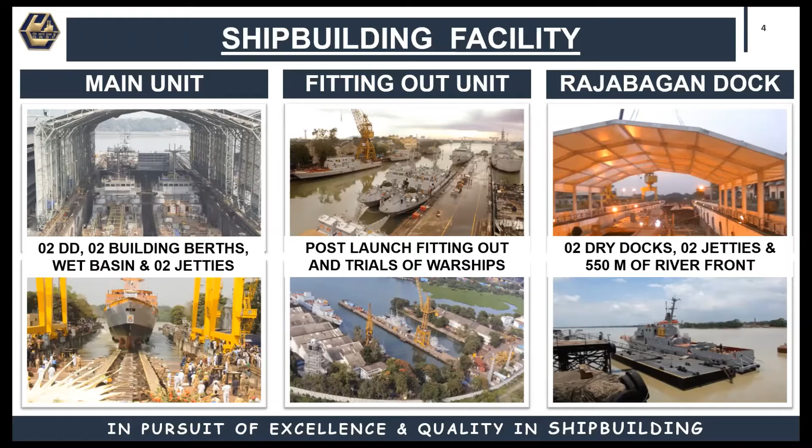Now, given the shipbuilding and repair locations of GRSE are spread at various physical locations, this put an urgent requirement for harmonization of production and inspection process with an aim of consolidated project progress monitoring. Now, few of the market-ready platforms were tried and tested without any fruitful gains. This paved the way for the indigenous development of digital platform, online inspection monitoring system, as a step towards digitalization and shipyard 4.0.

In shipbuilding industry, there exist a number of challenges faced in the adoption and realization of any digital talent. Not knowing one's business outcome is the first challenge, although it is not exclusive for shipbuilders. A well-known example for this case would be Kodak, where Kodak engineers were the first to develop digital cameras, but Kodak was not fast enough to capitalize on this technology, resulting in loss of their market hold.

Adopting an innovative technology requires a complete business transformation, but unclear vision of the technology's revolutionary capabilities instills fears of its disruptive potential. Traditional manufacturing mindset, industrial working culture, shipyards' physical condition, as well as long shipbuilding production cycles form the cultural barrier to digitalization. Picking the right platform to harmonize processes involving multiple stakeholders forms yet another hurdle, as shipbuilding puts a requirement of high customizability of the platform with each project.

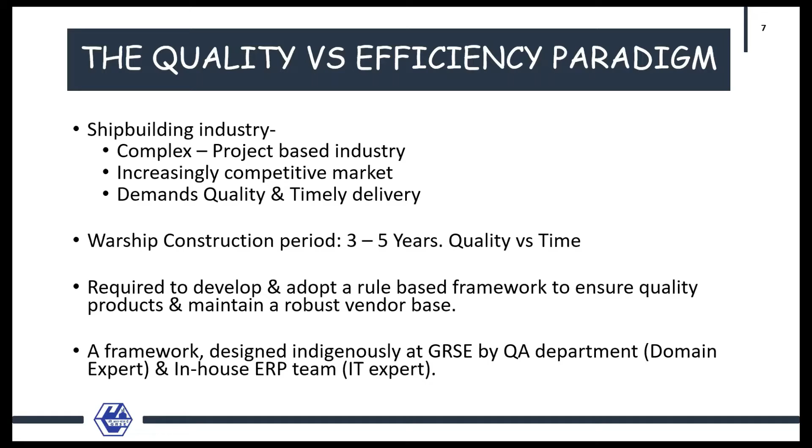With an increasingly competitive market, developing and adopting a rule-based framework to ensure quality products with timely delivery is extremely critical. With this, the foundation of OMS at ERP platform was framed with a focus to capture the quality activities of shipbuilding, in turn capturing project progress and maintaining a robust vendor base. Now, just to understand the concept, the idea behind OMS, I'll just show this flow chart.

Once the job is completed by production, the job is first internally checked by the production in-house QC team. At this junction, the job can either be accepted or rejected. The rejection results in corrective action by production and reoffer, while acceptance results in a formal offer being sent to quality assurance team of the yard.

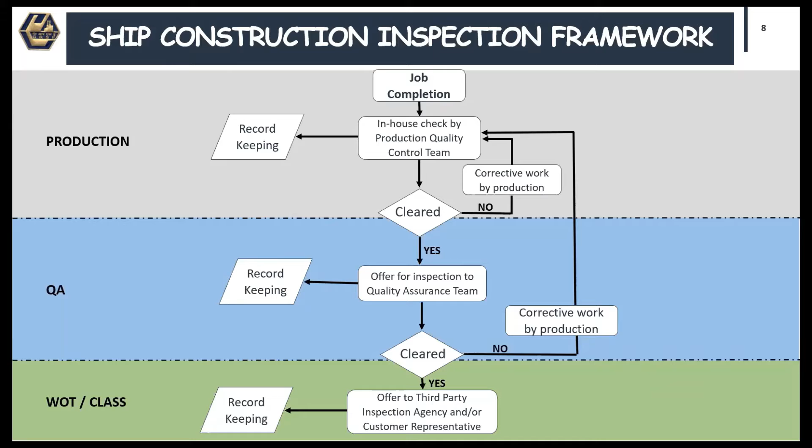The cycle repeats at QA, and acceptance of the job by QA results in an invitation for inspection being sent to customer representative or class surveyors. Irrespective of the job's acceptance or rejection, a record is generated at each of these inspection stages, which is one of the critical aspects of the whole inspection process. Now, this tree shows a typical snap of various stages of shipbuilding inspections.

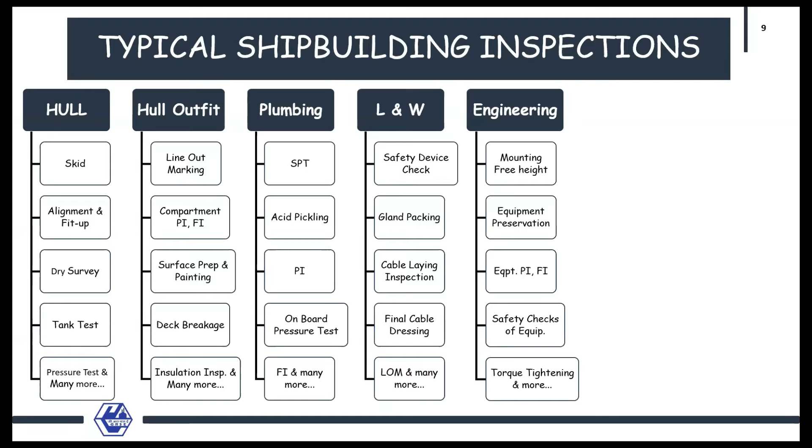The inspections are catalogued into various disciplines such as hull outfit, plumbing, electrical, weapons, engineering, etc. Each of these disciplines consists of a number of different stages of inspections grouped in various sequences. Construction of a defense vessel requires an amalgamation of hundreds of systems working perfectly in sync.

For the shipyard, this means manufacturing, assembling, and integration of thousands of discrete associated components comprising structures, pipings, cabling, etc. The various sequence of inspection stages is repeated for each of these smallest components for ensuring optimum quality, and at each of these inspection stages, a physical report is generated.

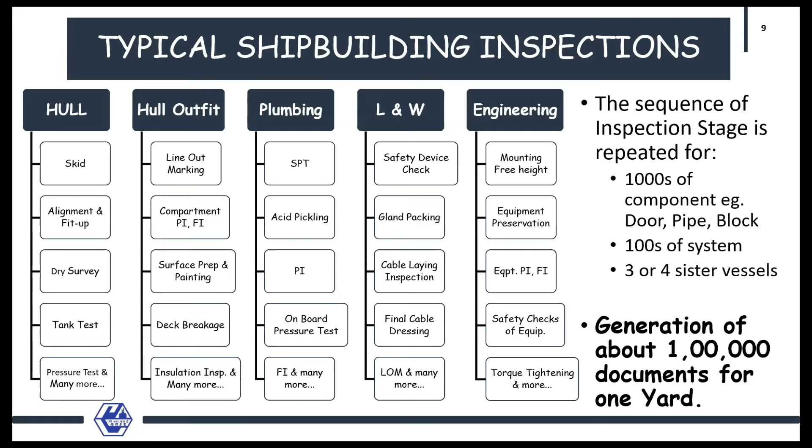Now, looking at this, one can really appreciate the amount of physical documents this generates, which range somewhere around 1 lakh, and that too only for one vessel. This is again repeated for each of the vessels being constructed in the shipyard. Now, generation of physical documents poses limitations in real-time monitoring of the progress of inspection, as well as storage and retrieval of historical inspection data.

Now, with these challenges, the OMS was designed to replicate the as-is process of inspection activities to an optimized workflow, which has been refined over the period by the vast experience of GRSE of building over 100 warships. OMS has been developed on the base stack of Intel hardware, Unix operating system, secure Java, and Postgres database.

As complete development of the platform has been done within the campus, the source code belongs to GRSE. Also, since the development stack has been chosen to be open source, it is independent of OEM for customization of software, as Java developers are easily available in the IT industry.

Inspection reports are generated in the system in a fillable PDF format secured with a PIN, which is unique for the user to which the job or inspection has been assigned. Each transaction in the system is done with an individual secured login ID, and every change made in the report is logged into the system.

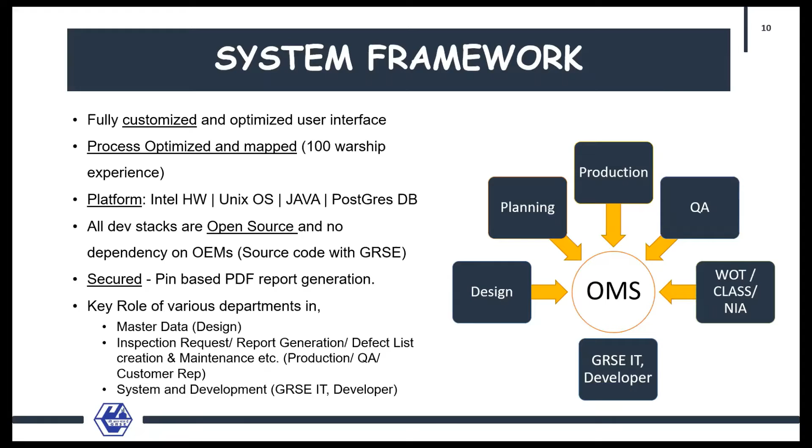The system framework defines the roles of various departments like design, planning, production, and inspection authorities for data creation, data feeding, maintenance, and inspection transactions on the software. Now, OMS is an industry standard open source IT platform developed with 5 key objectives.

The first, a single point of recording and retrieval of all inspection activities by various stakeholders. Second, an effective user interface, along with no restriction on number of users while adhering to the defense cybersecurity norms. Third, real-time tracking of components inspection and project progress monitoring.

Fourth, leveraging it to create a robust vendor base by capturing quality aspects of vendors like number of reoffers, rejections, time taken for completion, etc. Fifth, but not the last, leveraging OMS for data analytics, benchmarking, and AI capabilities.

Now, this is a sample of an OMS generated report, an editable PDF report actually, in which spaces are defined where various inspection stakeholders shall input their comments only in their marked areas and subsequently record their observations. This editable PDF is secured with a system generated PIN known only to the person on whose ID the inspection has been assigned.

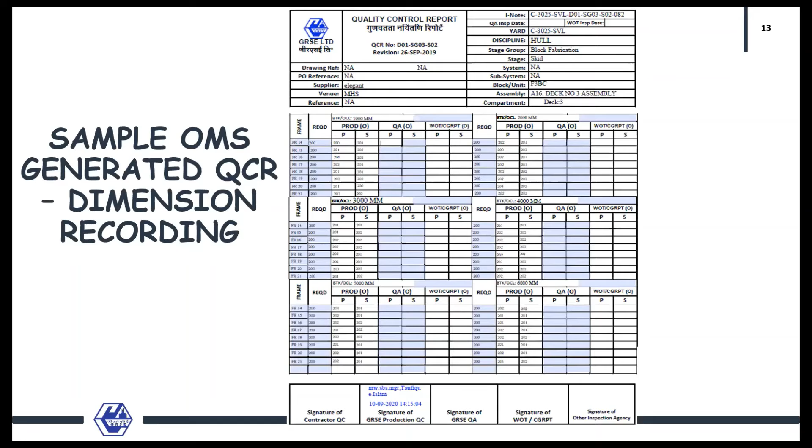The report formats have been designed such that all necessary parameters can be captured in the report during inspection. As can be seen here, there is a certain format for recording the dimension also during the inspection. The key advantage of using such secured and fillable formats is that these reports can be taken offline from the system to the site, filled, and then at a later time uploaded in the system at users' convenience.

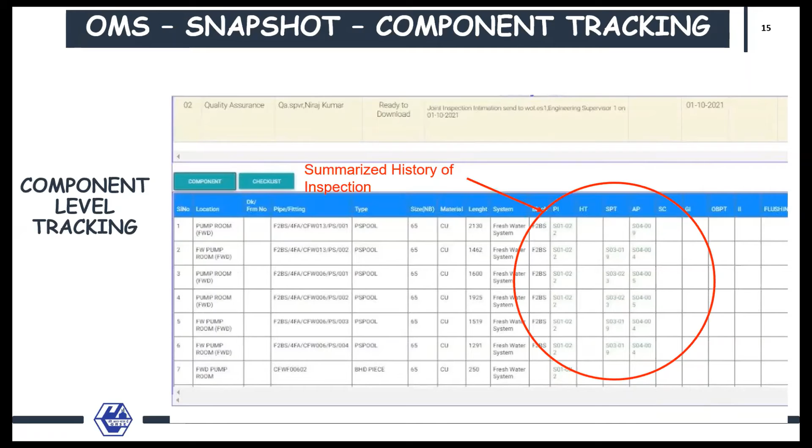Now, another key objective of the platform is project progress monitoring. A dynamic pictorial representation of the project as seen in the framework is automatically generated as various transactions are undertaken in OMS, giving a comprehensive depiction of current project progress.

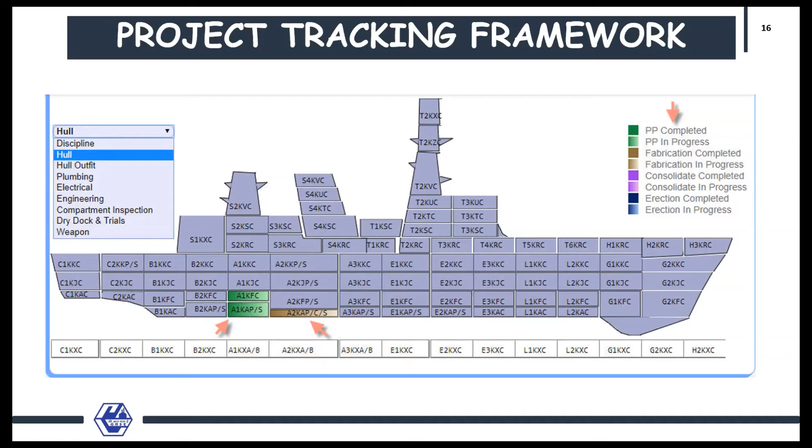Now, additionally, GRSE is in the process of implementing a total project management system with Teamcenter of PDM-PLM as a platform. A framework to integrate the data captured in OMS with that in Teamcenter is being developed right now. The framework for integration would require the summarized data like project progress to flow between the two platforms.

This would enable the user to view complete project data, including drawings, technical specs, as well as inspection progress at a single platform. With the implementation of OMS in GRSE, the inspection process has completely been revolutionized.

Comparing it with the previous manual system, the time taken to generate and process an inspection report for daily inspections has decreased significantly, where earlier a copy of inspection reports was physically moved to all stakeholders, including inspectors and class surveyors and their respective supervisors for endorsement. Now a report is endorsed with digital stamping of individual login details within a couple of clicks.

Maintaining traceability with OMS is a lot easier as all the historical data remains in the system and can be retrieved at any point of time, whereas the manual system mandated that the records be physically stored with appropriate care. The approach for project progress tracking has also become digital and system driven instead of manual.

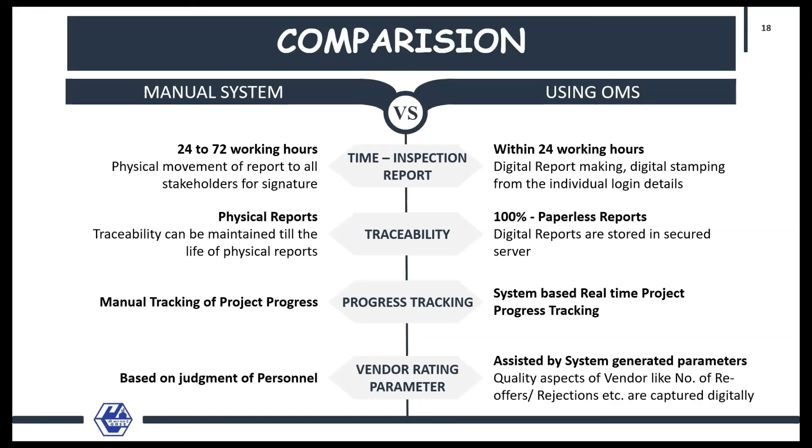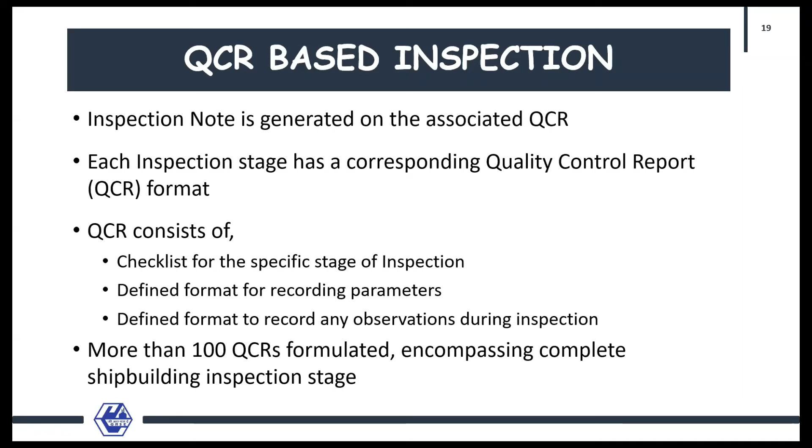OMS is further complemented by a QCR-based inspection report generation. Quality control report formats, or QCR in short, have been formulated for each stage of inspection. These formats primarily consist of checklists for individual inspection stages, a defined format for any parameters which must be recorded during the inspections, as well as spaces for the inspection authority to record their observations. More than 100 QCRs have been formulated, which encompass complete shipbuilding inspection stages.

OMS achieves a balance of both time as well as cost saving by being a single point of all inspection transactions and report generation, tracking the progress of the project, tracking delays in the project and aiding in preventing any LD due to the same, providing a platform for record keeping and retrieval of historical inspection data in a paperless manner, identification of efficient vendors and thus creating a robust vendor base, identification of critical areas of a project before it hits time and cost overrun, and also its capability of data analysis through MIS.

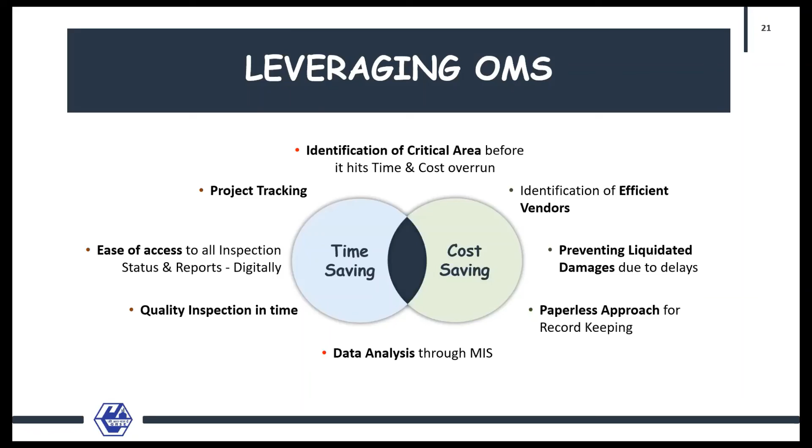Now, OMS is developed with a base stack chosen such that it is easily available in the market, is better virus resistant, and also provides independence over OEMs for customization, as the development stack is open source and Java developers are easily available in the IT industry.

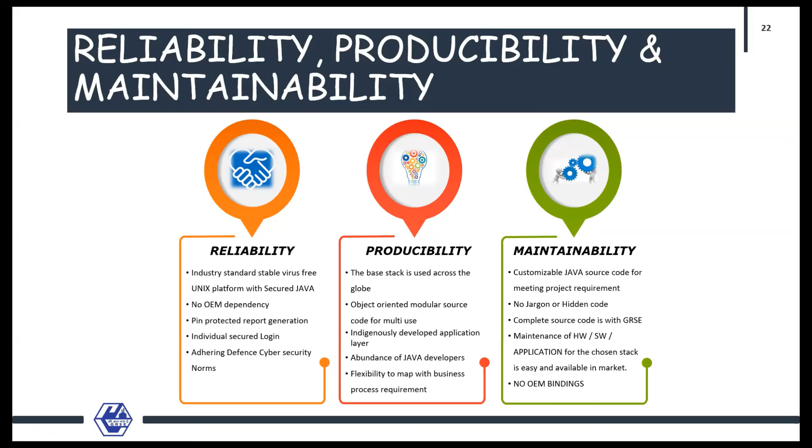Features like PIN protected report generation, individual secured login, flexibility to map with business process requirements, and, as the platform is developed in-house, no jargon or hidden code, in turn tend to enhance its overall acceptance and usage.

The concept of OMS has been approved by various stakeholders involved in the project, with production, GRSE production, GRSE QA, Indian Navy reps, WOT, as well as the classification society. OMS has been divided into various modules based on discipline. Each of these modules has been launched in a phased manner only after getting concurrence from all involved stakeholders for that module.

Now, since all the historical records of inspection are stored in OMS and can be easily retrieved at any point of time, the customer's confidence in this platform has increased time and again. OMS, being a platform which has been developed completely in a shipyard's environment, has the ability to completely align itself with various project requirements. In OMS, the development of workflow is governed by the as-is process requirement and not the other way around.

The concept of PIN-based fillable PDF forms was introduced, which is a key feature of OMS and can be extended to various business applications of various organizations. The PDF allows various stakeholders involved during the inspection to fill up their respective data elements in the report, which then can be fetched by the system and used for the purpose of data analytics.

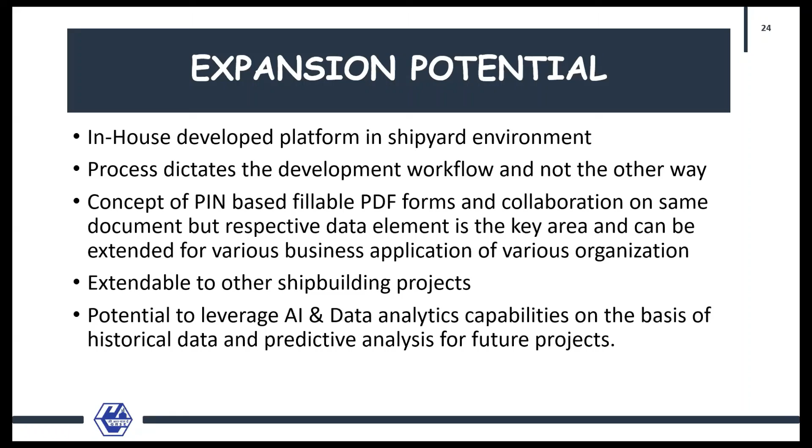Using this platform over time would gradually increase the historical data set, which then can be used to leverage the capability of AI and data analytics, as well as predictive analysis of future projects.

To conclude, the key advantage of OMS will remain its flexibility to align with organizational requirements, provision for project progress monitoring, as well as usage of fillable PDF forms with secured PIN. These reports can be taken offline securely and then later uploaded in the system. Continuous use of OMS will again generate historical data in a structured and clean format, which can be used for benchmarking and AI capabilities.